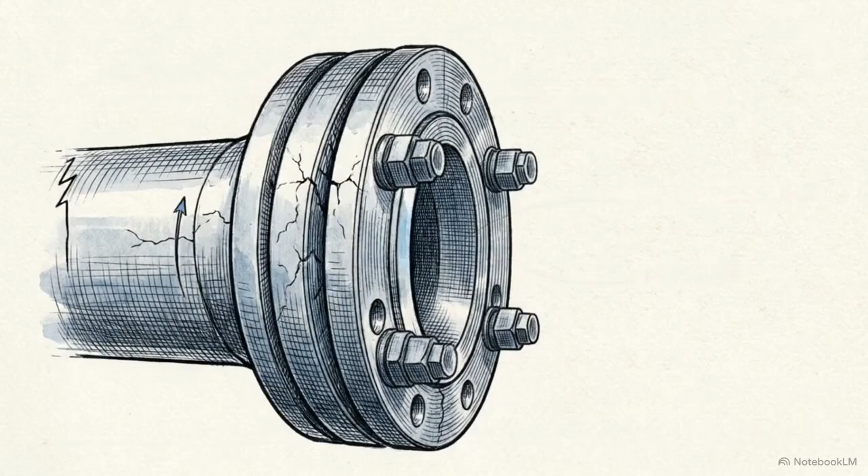A microscopic gap is all it takes. Under immense pressure, an industrial pipe joint can turn a tiny seating imperfection into a catastrophic vapor leak.

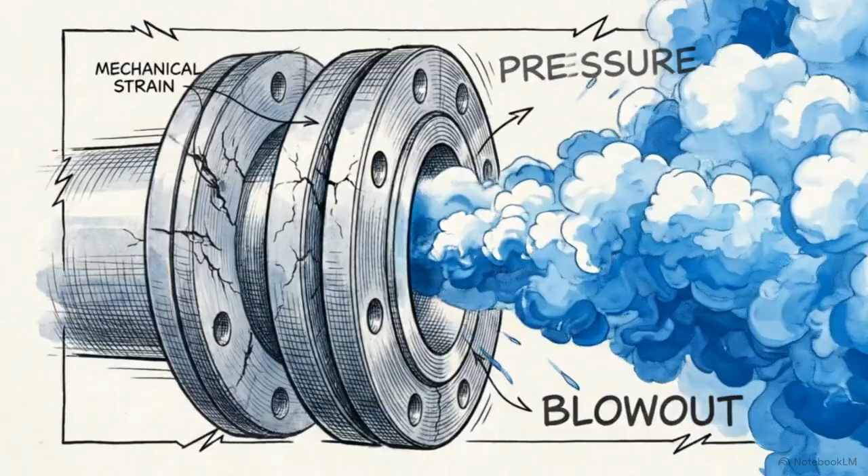To prevent these high-pressure blowouts, industrial engineers rely on the ASME PCC-1 guidelines. This standard provides the exact mathematical baselines required to guarantee a safe, reliable seal.

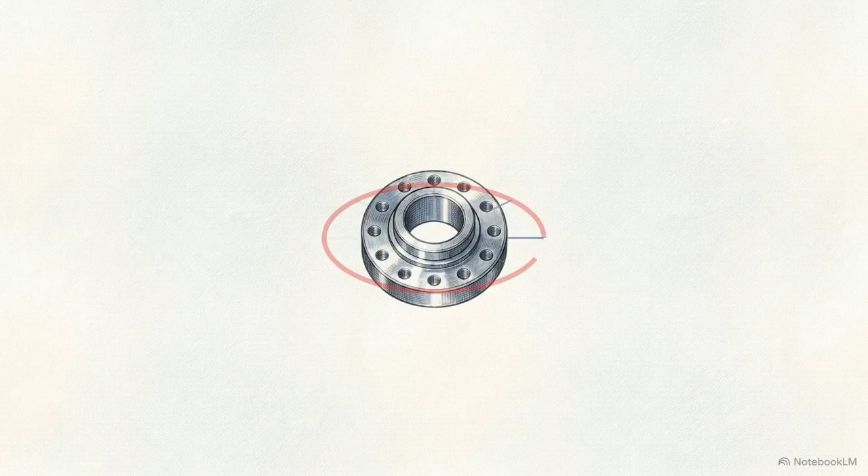Today, we are going to walk through how to apply this standard in the field. We will cover how to measure pre-disassembly gaps, map the surface flatness, and calculate exact defect tolerances.

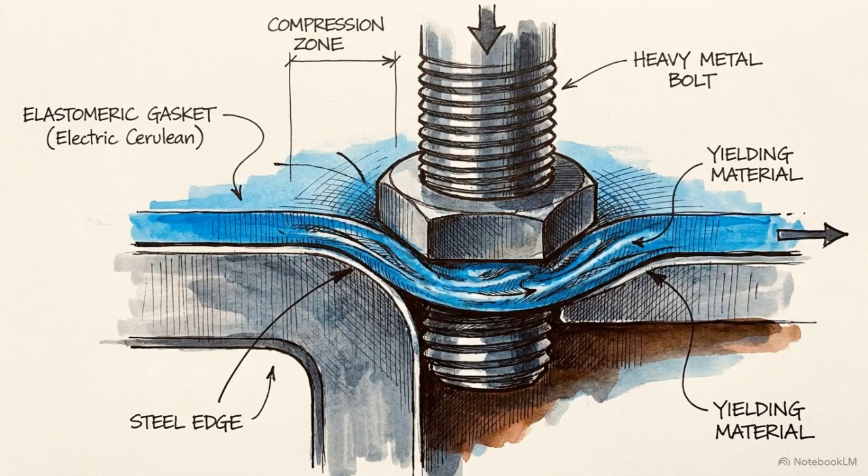Before taking a single measurement, we have to define the hardware. The PCC-1 standard categorizes all rules based on whether you are installing a hard-face gasket, which is unforgiving, or a soft-face gasket, which has more compression and can tolerate slightly more variation. Preventing a high-pressure breach relies on measuring fractions of a millimeter against these rigid, unyielding standards.

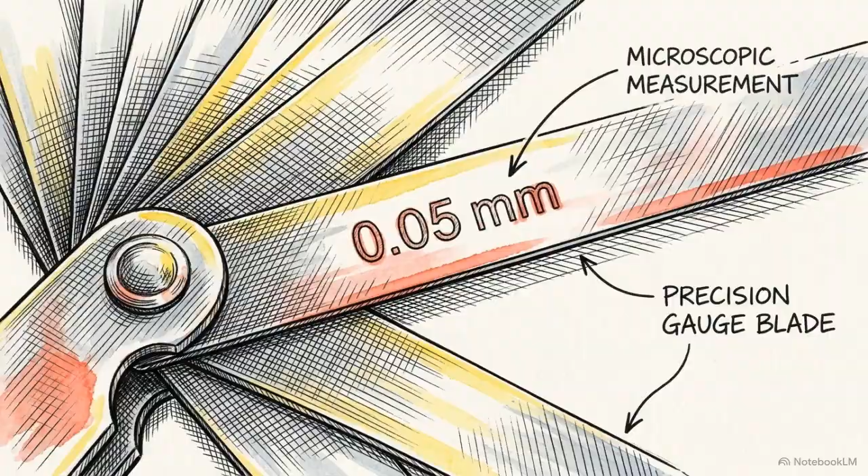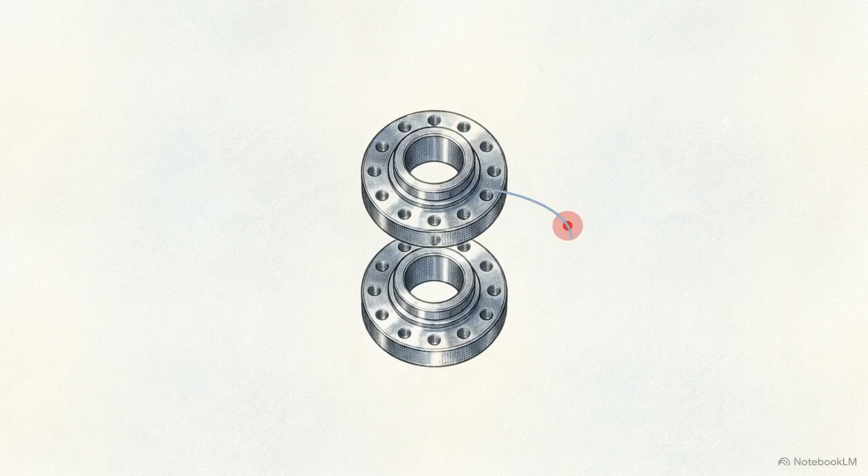The inspection protocol actually starts before you open the joint. Your first step is to check the gap between the outer edges of the raised flange faces. You need to measure this distance all the way around the circumference. To pass, the gap must be at least 1.5 millimeters, or 0.062 inches, at every single point.

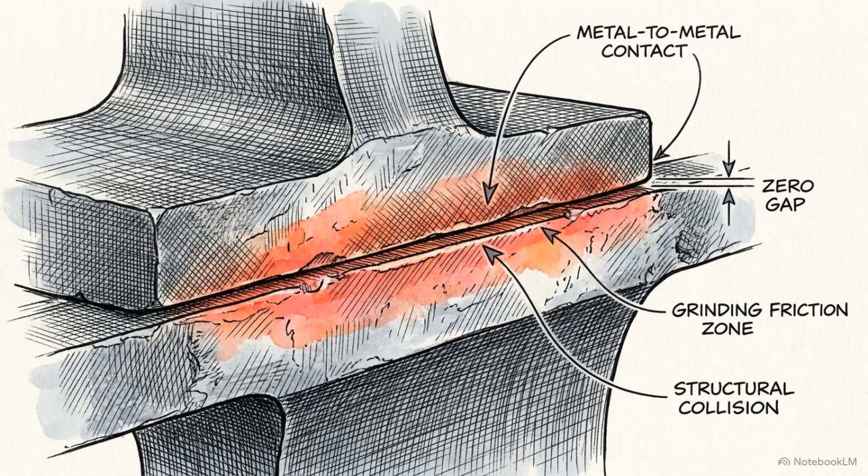If the gap falls below that threshold, the metal flange faces risk touching each other when bolted together. When the faces touch instead of fully compressing the gasket, joint leakage is practically guaranteed.

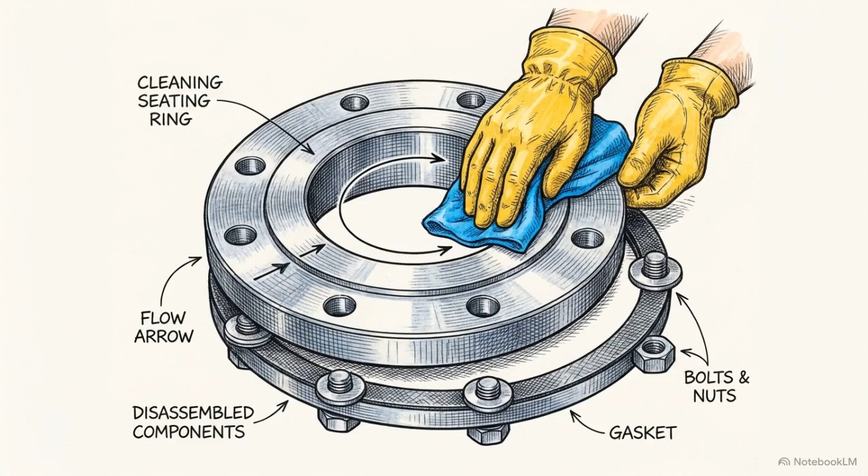Once you have verified the gap and safely disassembled the joint, clean the seating surface completely. You are looking for any physical damage, dents, or scratches across the bare metal.

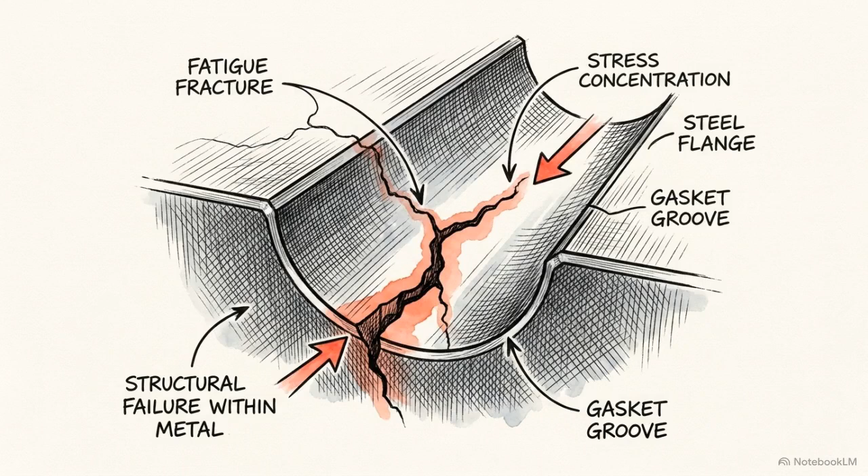If your visual sweep reveals actual cracking inside the gasket groove, stop the standard inspection immediately. Cracks require a specialized repair protocol, and you will need to refer directly to ASME PCC-2, Article 305 for your next steps.

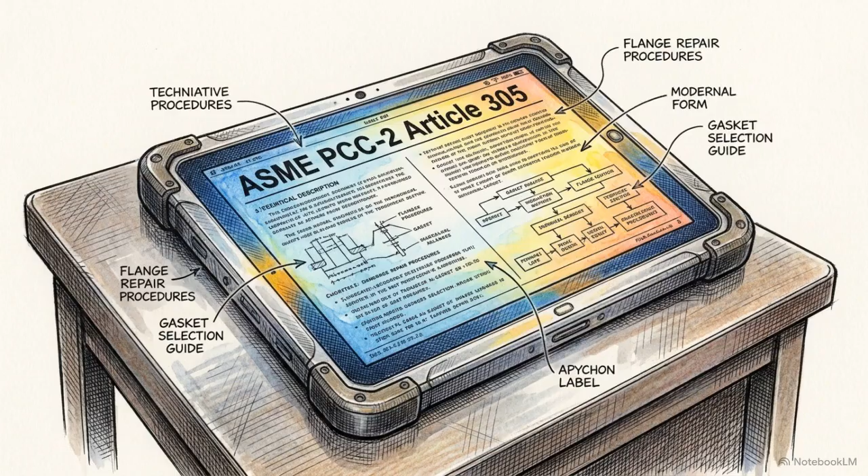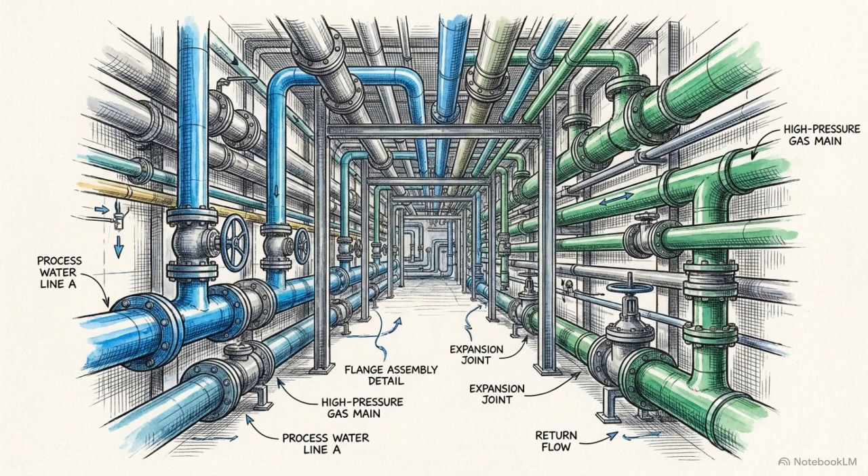By checking the external gap before opening the hardware and scanning for critical fractures immediately after, you can predict and prevent mechanical failure before you even begin the micro-measurements.

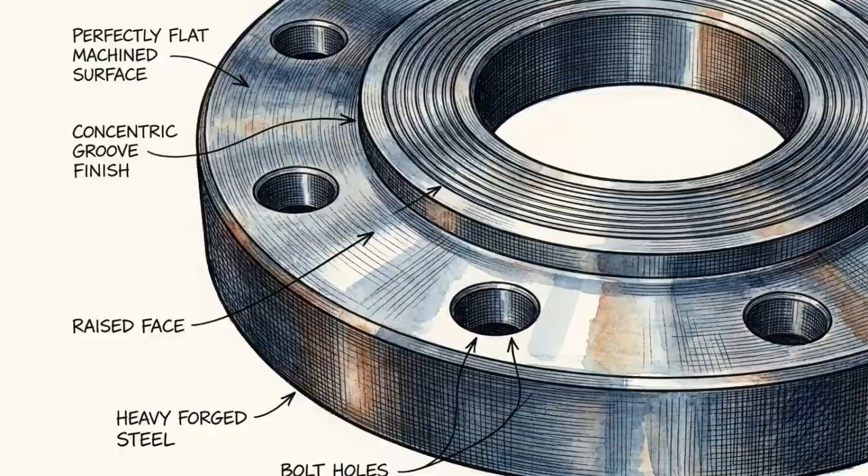With the surface clean and intact, we need to ensure the flange is actually flat. We start by measuring the circumferential flatness of the gasket seating surface.

Looking at figure D-2-1 from the ASME standard, you can see the precise alignment method. You must set your measurement tool and establish the datum at 4 distinct points around the full circumference of the seating area.

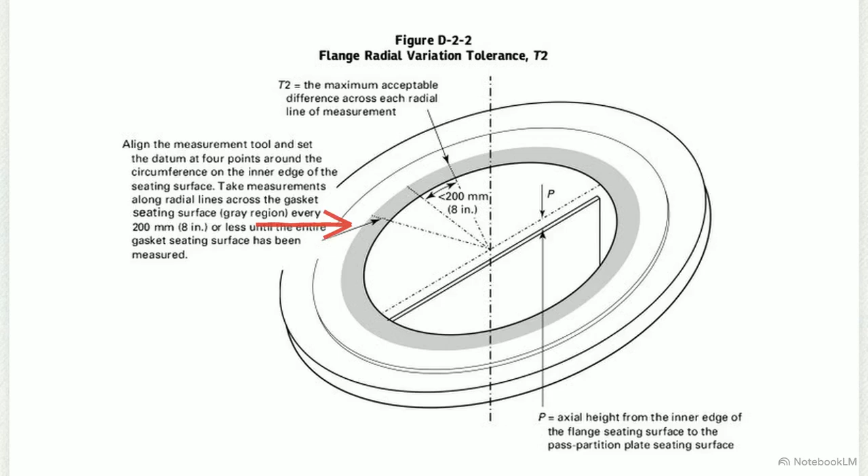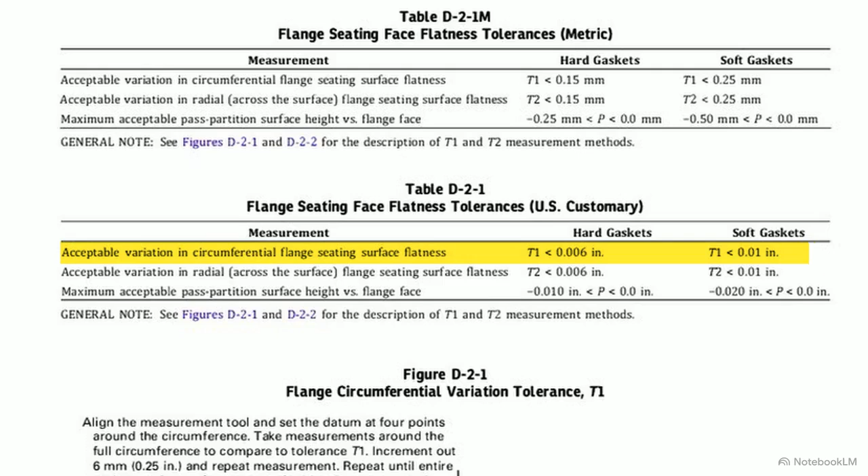Moving to figure D-2-2, we measure radial variation. You take measurements along radial lines across the gasket seating surface, repeating this every 200 millimeters or less until the entire face is mapped. You then cross-reference these high and low measurements with the tolerances listed in Table D-2-1.

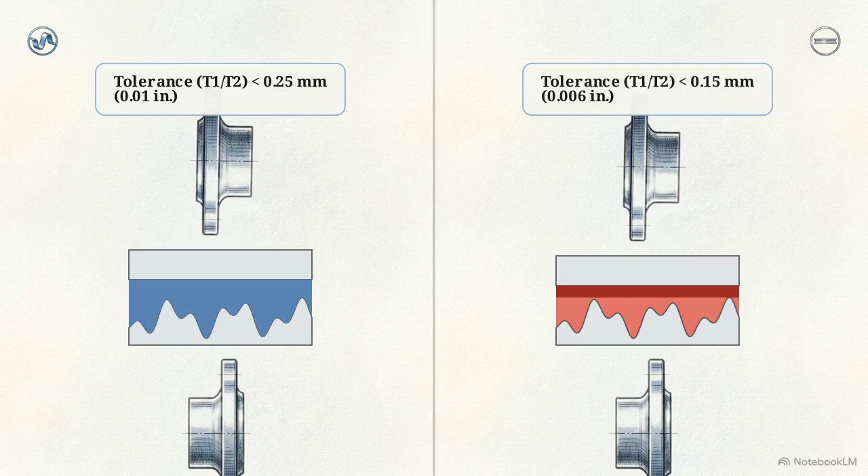Because soft gaskets compress more easily, they allow for slightly more topographical variance than hard gaskets. A surface might look perfectly smooth to the naked eye, but true flatness is a mathematically mapped topographical reality.

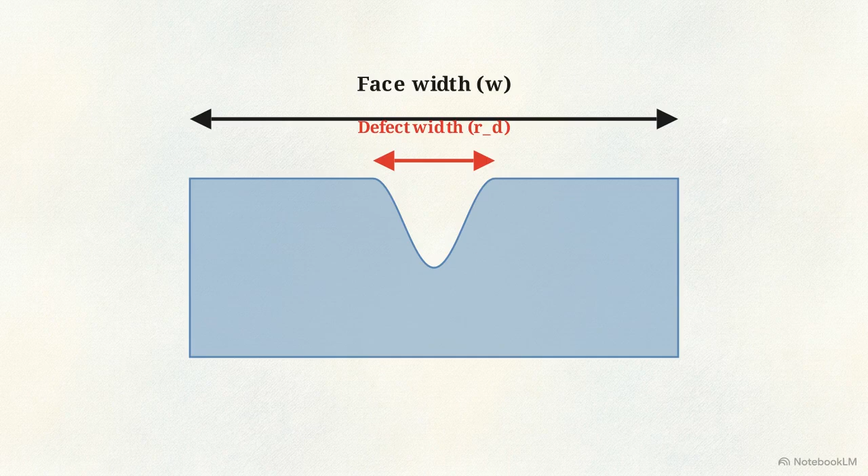A defect's danger depends on 2 variables: the total face width, W, and the radial dimension of the defect, RD. Before checking limits, calculate depth correctly. Measure starting from a strict baseline across the surface serration peaks, straight down to the defect's bottom. Now we compare the sizes.

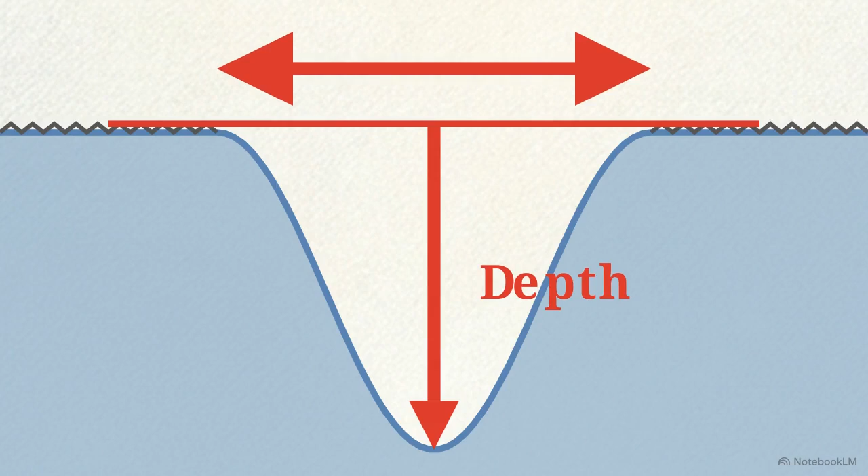For small defects where the radial width is less than 1/4 of the total face width, hard-faced gaskets allow a depth of up to 0.76 millimeters. Soft-faced gaskets allow up to 1.27 millimeters.

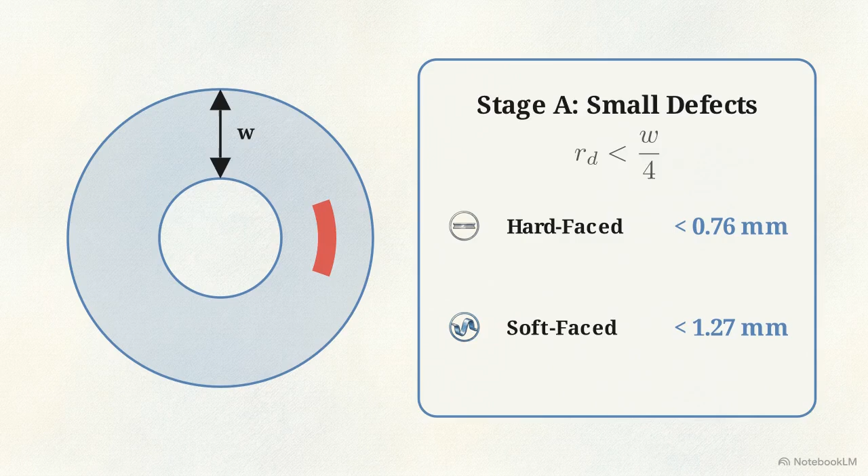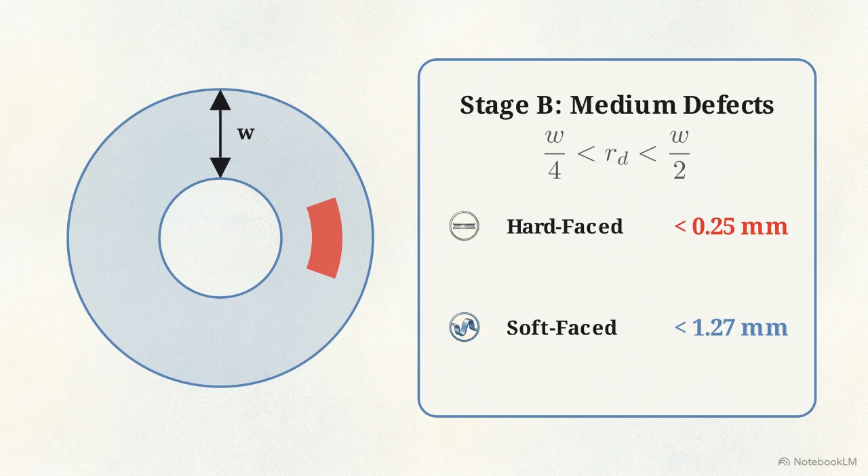When a defect spans between 1/2 and 3/4 of the face width, the rules change drastically. This size is strictly not allowed for hard-faced gaskets. For soft-faced gaskets, the maximum allowed depth shrinks to just 0.13 millimeters.

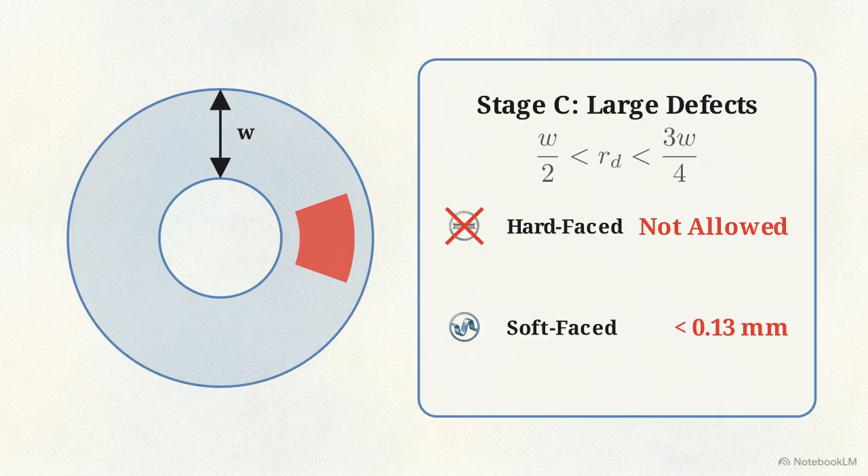Then there is the absolute failure rule. If any defect's radial dimension exceeds 3/4 of the flange face width, it is an automatic failure. Neither hard-faced nor soft-faced gaskets are permitted.

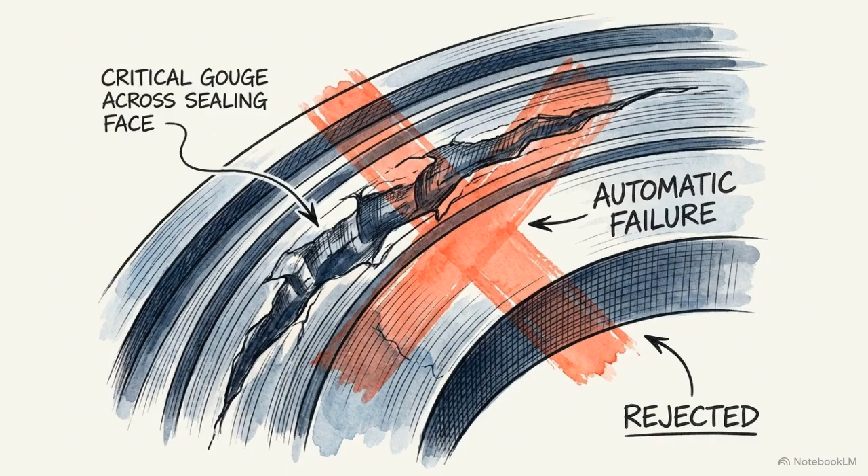There is one critical exception to remember. Ring-type joint, or RTJ gaskets, must always be evaluated under the strict hard-faced tolerance rules.

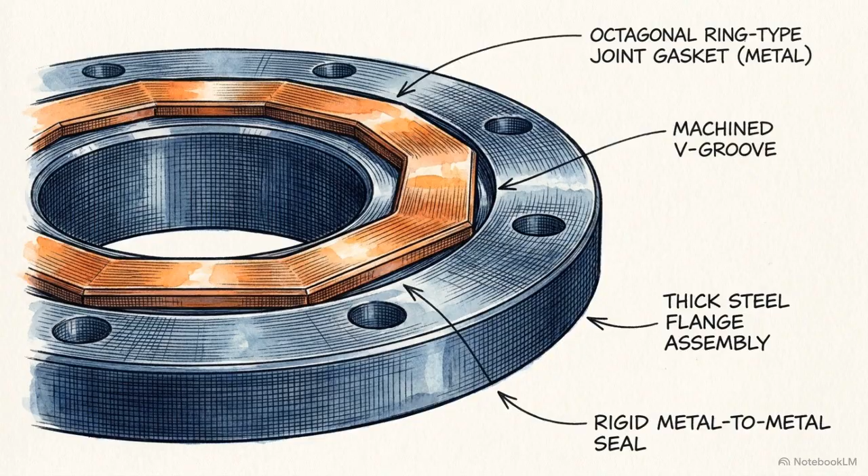An isolated defect depth measurement tells you very little on its own. Its potential to cause a catastrophic leak is dictated entirely by its proportional footprint across the flange face. By calculating the precise radial dimension and depth against these ASME thresholds, you now have a definitive pass or fail condition for your hardware.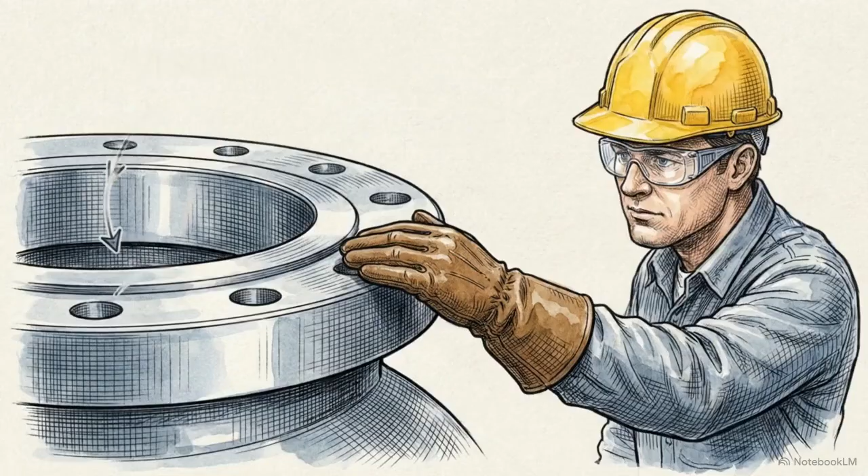However, if your measurements exceed these limits or fall right on the borderline, the standards require professional engineering judgment. An expert must assess the joint's leakage history, hardware flexibility, and specific operating risks before the system can return to service.

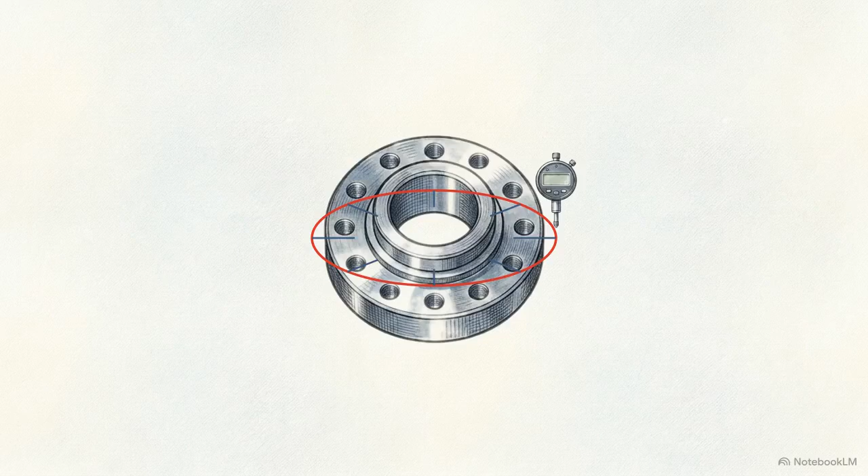We started by verifying external gaps to prevent flange collisions, mapped the topographical flatness to guarantee a true seal, and calculated exact defect geometry against strict tolerances.

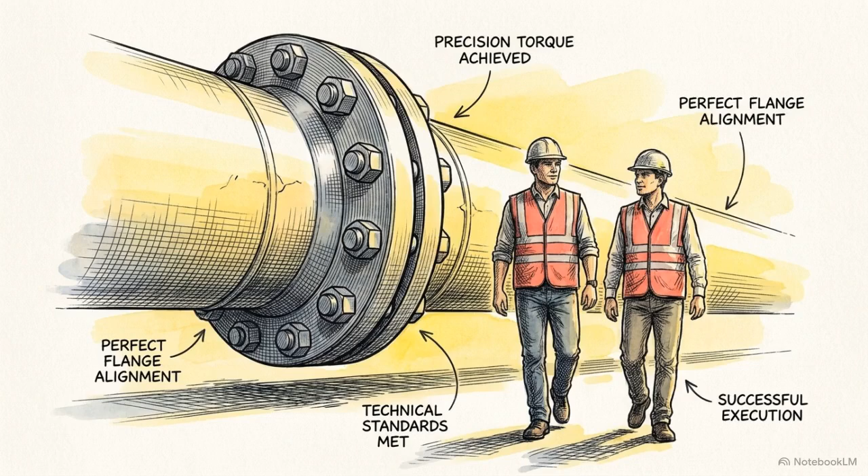Meticulous human execution transforms these technical standards into a functional, leak-proof reality.